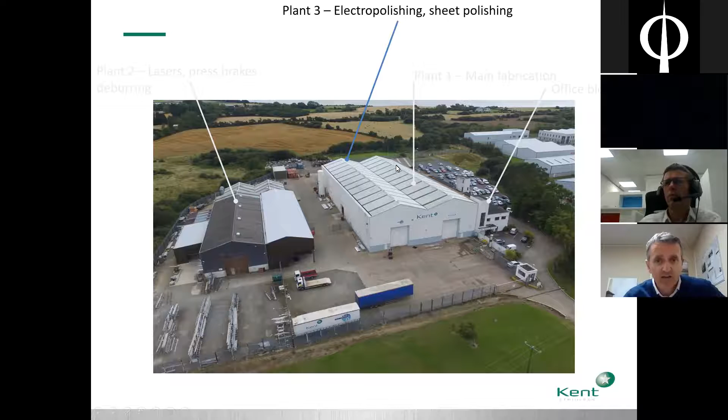A thing we really pride ourselves on is the finish of our product - we're not happy unless it's finished to the highest possible degree. In-house we've got electropolishing facilities, manual sheet polishing, and automated sheet polishing. A secondary fabrication area was just finished towards the end of 2020, and surrounding that we've done a huge amount of civils works to allow free movement of trucks and forklifts around the building.

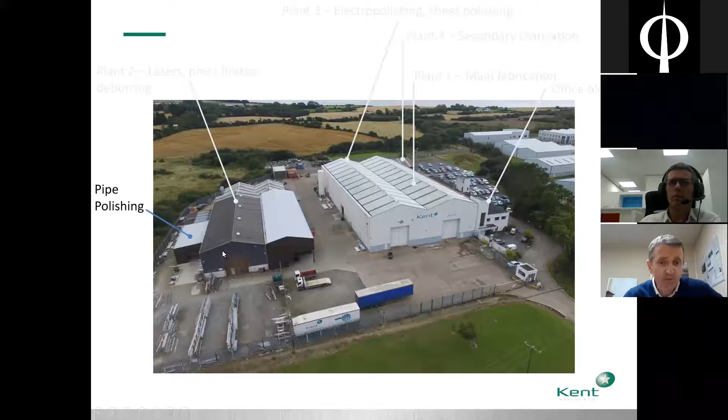You can just make out the roof of that building - another area for pipe polishing, which itself is a specialized skill, and then bead blasting, another type of finish which is also a specialized skill. We're unique in having all these different processes under one roof, under one company.

Some of these processes you might be familiar with. The big thing our owner Pat Kent has always done over the years is invest in equipment - in the last couple of years we've invested in new sheet laser cutting. This pretty new machine allows us to cut things like sheet, box section, round shapes, pipes and tubes, all part of the design and fabrication process. As we take an idea from an architect, engineer, or landscape architect and turn it into reality, we're using all this equipment constantly.

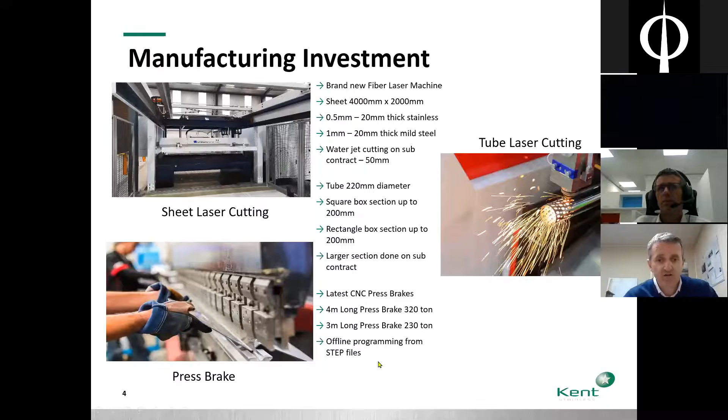The brake press was another investment in the last couple of years.

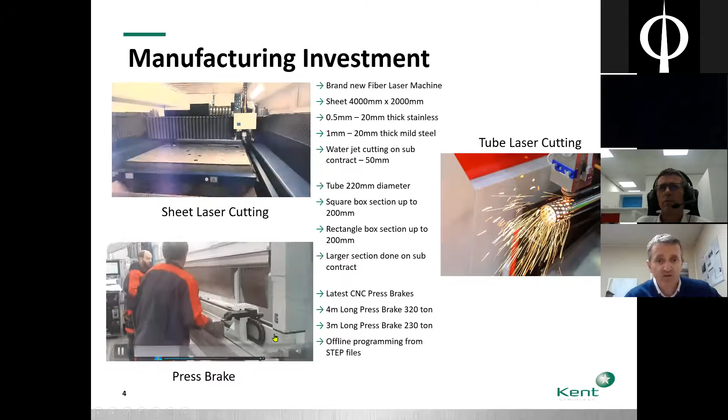Again, it's just allowing you more flexibility on what you can actually produce, fabricate, and put out the door. So it's always allowing us better tolerances on our products, better finish on our products, and that's the whole idea of investing in this equipment. So constantly looking to improve what we actually put out the door.

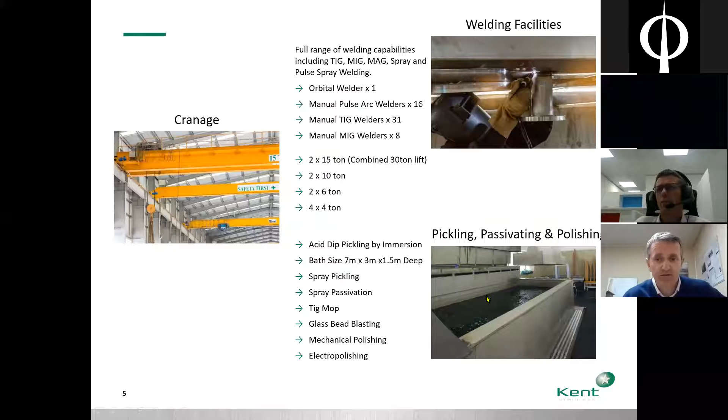Just some of the other equipment that is relatively unique. This pickling and passivating plant is the only one in Ireland for stainless steel. So when we have finished all the welding, welding obviously generates heat, and you have things like scorch marks and manufacturing marks on the product. We then dip it in this plant, which takes away all those marks for final finish.

So the areas we work in, the one area I'm really going to speak about today is civils landscapes. But just to be aware, we do work in a range of areas. Civils landscapes has really, for the last 10-15 years, been the growth driver of the business. When I started, we had a turnover of about 300,000 euros in this division. In 2019, it was about 3.5 million euros. So it's been a huge growth in the past 10 years.

That's driven by public realm improvements, mainly in London, but also in Ireland, especially in the last 5 years. We've seen a lot of projects in Ireland, and really what councils and developers are trying to do is open up public realm areas, make them more accessible, have shared surfaces so they're usable for everybody. The big thing we've seen, which can be quite simple, is trying to hide services within the public realm, either underground or within the finished surface level.

And really that's what's driven our business, down to about 5 or 6 products - things like access covers, ventilation grills, in-ground power units, planters for planting areas, and signage is another big thing. When you look at them from the outside it can seem quite simple, but when you see how not to do it and how to do it properly, there is such a massive difference. It makes such a massive difference to the final project.

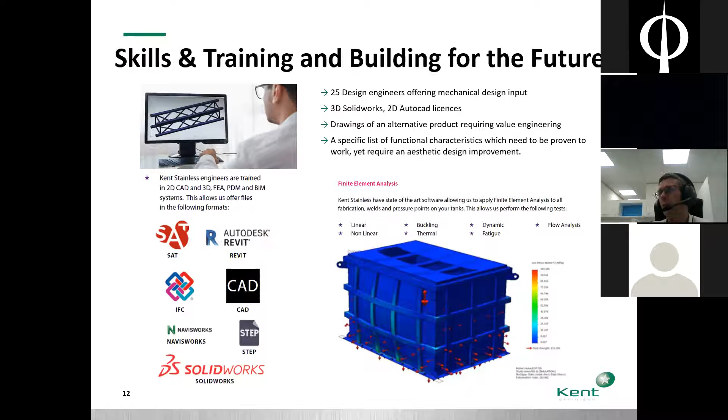One of the difficulties we see there is the IoTs, FÁS and the ETBs - they're not able to keep pace with the leading manufacturers and that kind of new technology. So there is a little bit of a struggle there. We get a lot of our training from the OEMs on that, and I would feel personally myself that the OEMs maybe don't put out enough training material because it's a revenue source for them as well. So they're probably a little bit reluctant to share that training material with the Institutes of Technology and the ETBs, and that's a challenge that I think we have to overcome at some point.

When I talk about how we structure training and make sure we have all the skills we need, we've broken down the whole process into 4 or 5 key areas. One is supply chain, which is really material procurement, purchasing, logistics, dispatch and shipping. The key elements there are planning, negotiating, stocks, logistics, deliveries, and scheduling, which is now becoming a very key part to a manufacturing process. Lead times are getting shorter and demands are staying quite high, so scheduling is very important, and it's a supply chain issue.

What we do then is material preparation and kitting. Once you have material in, we have one team of people segregated off to do all of the pre-manufacturing operations. This is where your machine operation would come in, like milling machines, lasers, sawing, drilling, and then we get kits ready so that once we send material across to the fabrication area, the guys are ready to go and not waiting on anything, and that can have a big impact on efficiencies, or not, as the case may be.

Then our main area would be forming and fabrication, and this is pretty much craft driven, especially fabrication, because we're predominantly fabricate and welding is our core skill, and then assembly and testing after that. What we've done this year, as a change, is we appointed a full-time trainer who stays with all the young apprentices and makes sure they're getting state-of-the-art training and a lot of personal attention over the first year or so that they're in the business.

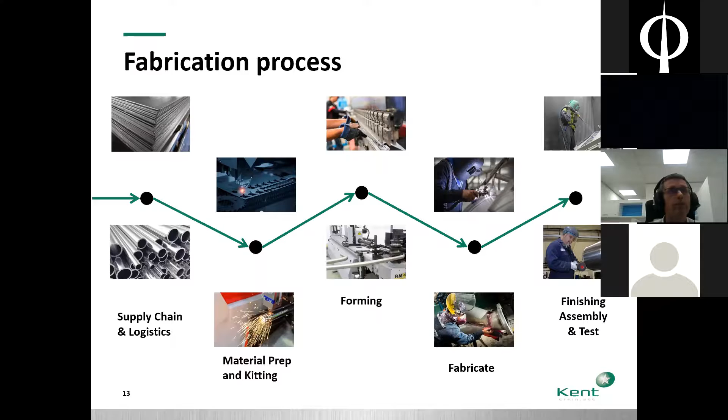Training then across all the departments—within Kent we would have 12 apprentices across the trades, mainly in fabrication, fitting and welding. As I said, we've appointed a full-time trainer who supports all those guys and works with them through FÁS. We also bring in journeyman welders and train them up as well. They wouldn't necessarily go through the apprenticeship program; they'd go through our own in-house program, which is about a 22-week program to get them up to speed, and then they'd be welders basically.

Machine operating is where the big difficulty is—we have difficulty attracting people in that area, and the reason is there's very little opportunity out there for people to get certified. So we're working with Carlow IT, with a broader industrial base in the southeast, to get some programs up for milling, drilling, laser cutting, folding and forming. One thing we're seeing is that this task or job area is falling between the cracks—people either want to go the apprentice route or the engineering route, and when engineers come back they don't want to be machine operating. There's a gap there in the market that we really have to address over the next couple of years.

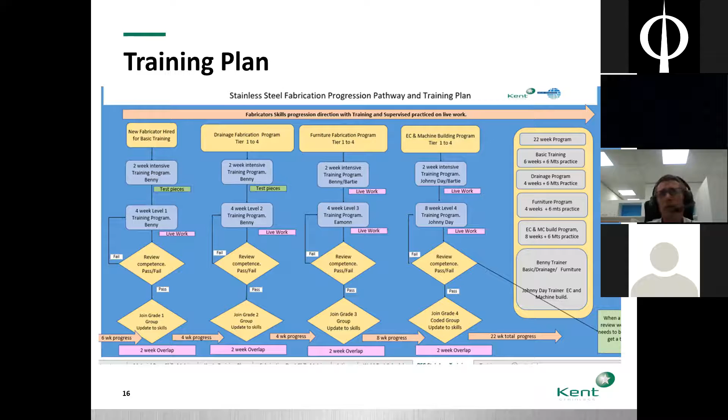We have this supported with up to 8 weeks formal training, and then 6 months of practice, all supervised by the trainer. So it's quite a good framework. We put a lot of work into it, and it does pay dividends - we're seeing that already. We introduced this about last February, March, and it is quite good.

So look, other initiatives - again, I suppose a big culture change was a dedicated one-man trainer in place since 2020.

I suppose the development of new technologies and new processes around folding. We brought in a software package called Boost about 2 years ago, and that has really changed the way that we manufacture products. Basically, what Boost will do is test every piece of every design before it goes to cutting and forming. So it has reduced the amount of waste and wrong parts by a considerable amount, and that increases efficiency. We brought in precision machining, and more polishing equipment and capability over the last 2 years or so.

Most of this is customer driven. What we do is, especially in the public realm area, we see increasing demands, and people need things to look nice. And that's really what's driving it, and it's keeping us at the forefront of the competition as well.

Recruitment challenges - apprentices are hard to find, especially good apprentices, but once we show them a pathway and a structure, I think we can attract and keep them. They need to be flexible, multi-skilled, and confident working with automation. I think that's the next step change for Kent - cooperating with robots, maybe not full robotics, but that's coming, and we have to build that into our selection process over the next 5 to 10 years.

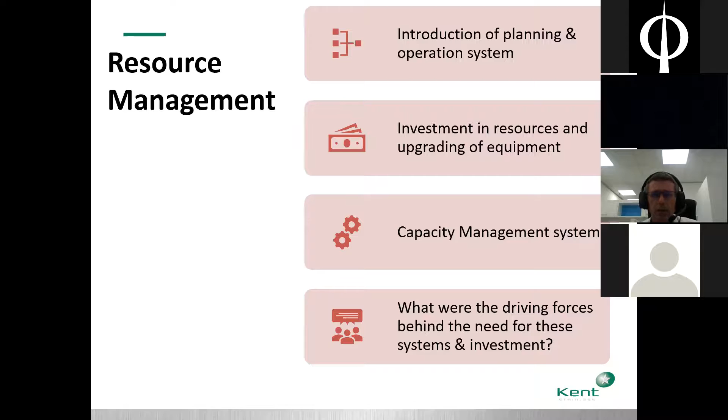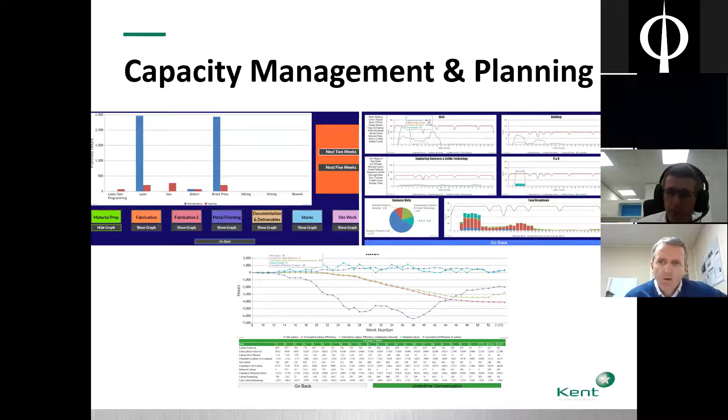I think that's about it for me now. There's just one slide showing a little bit about where we're going with visual management - it's important we keep all our employees informed of how we're doing on a daily, weekly, monthly, and quarterly basis. That's a snapshot of some of the graphs and visual aids we're rolling out. So I hope you got something from that in terms of skills and how we're managing them, and it gives you confidence that we can meet your needs going forward.

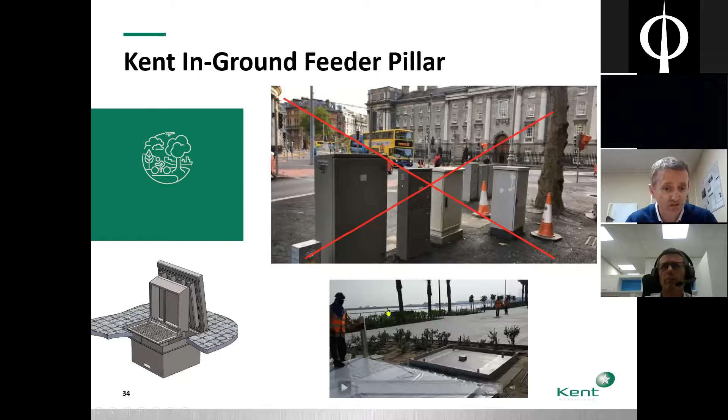And I suppose the issues that we've seen over the years, we've all seen areas like this where you have mini pillars, feeder pillars, necessary service equipment that is on the street, powering street lights, used for tram systems, or traffic lights and other necessary services that have to be in the public realm. So our challenge is always to reduce this visual impact and remove as much of this as we can and place it underground. That's where the in-ground power unit came from.

So what is it? First of all, it's that environmental and comfort factor. You're taking generators and noise pollution out of the equation and making an area as comfortable and environmentally friendly as possible. The health and safety factor - you don't need any special training to use our product. It's a very simple product to use. You don't need operation and maintenance training, it's a very simple hinge cover to use.

Why it's come about, and where the drive for this product has come from, is these shared surfaces - you're implementing public realm strategies, and you need accessible power in these locations most of the time. We've just seen a demand, especially in London, especially in the Middle East, for this type of product.

What we've come up with in the last couple of years is that we've included within the unit a system where you can actually generate revenue from the in-ground power unit. By installing the cover, there's obviously a cost - you have to buy the unit, you have to install it - but we build in a meter now, so you can charge the end user who's using the power. We've seen typically after about 6 months you've recouped the installation cost, you've recouped the purchase cost, and then you actually start to generate revenue. So that's been a big addition to the unit.

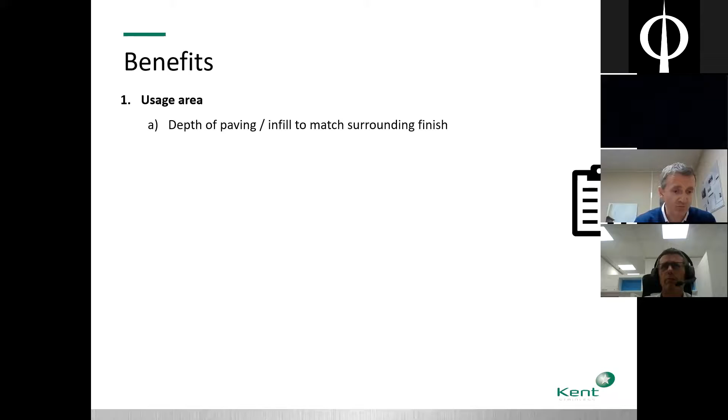Benefits of it: the usage area - you're always trying to hide that as much as possible in the shared surface. You've spent probably hundreds of thousands of euros on paving and installing and designing it, making sure that surface is consistent and a nice flat surface. So removing upstands from the surface is always a big key of what we're doing. Load bearing, obviously, in these areas - it is a shared surface, so typically you will have fire trucks or emergency vehicles that will drive over this. So we test and manufacture that to EN 124.

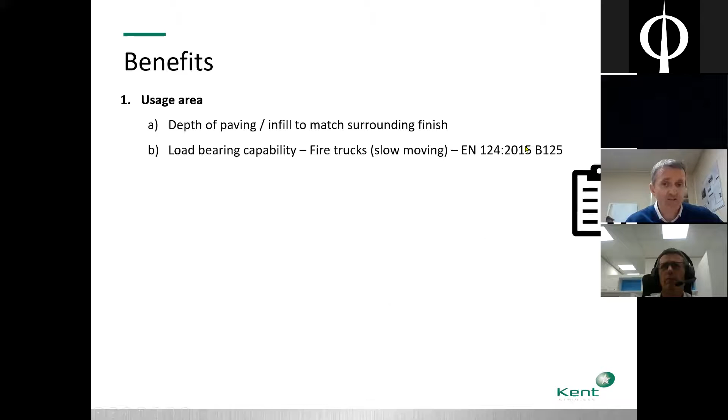Power requirements - typically we will see single phase and 3-phase within the boxes. What we've seen in the last probably 5 years is an emergence of including data points and fiber and audio socket outlets in the box as well. So what the data point allows you to do is create Wi-Fi hotspots in that particular area, again making the whole area very user friendly. But it also allows vendors to do card payment and contactless payments as well. So it's a big benefit to have that in such an easy location.

A single in-ground unit can be used to power many different applications. So it can be used for maintenance - that socket can be 3-phase or single phase, but it could be used for things like power washers for maintenance, and then obviously for vendors or street traders as well. So multiple uses from an individual product.

Putting electrics underground is difficult, but we make sure everything is IP67 rated and tested, and we use electrics only from reputable sources. So we use companies like MK and Schneider for RCBOs and things like that.

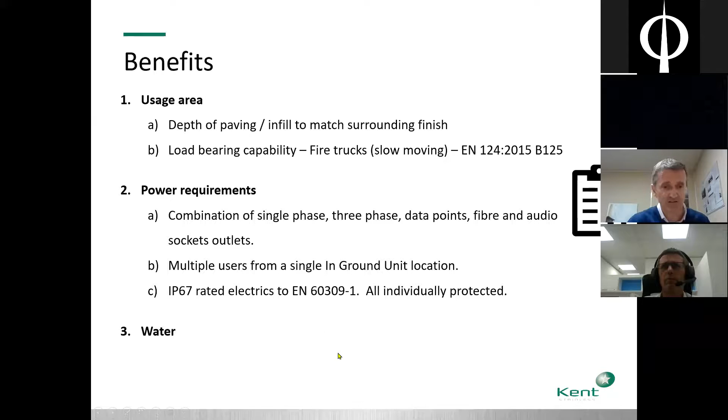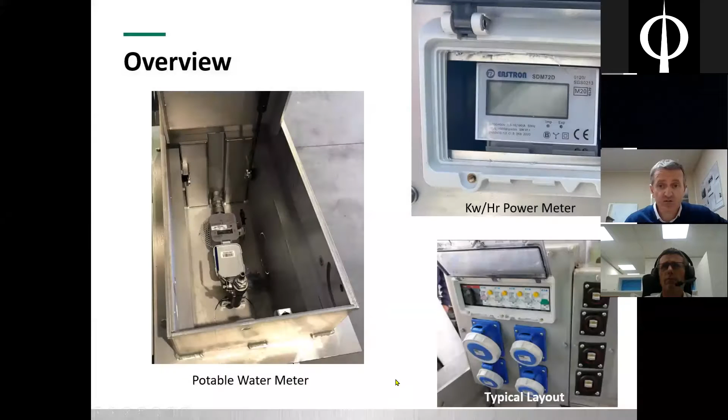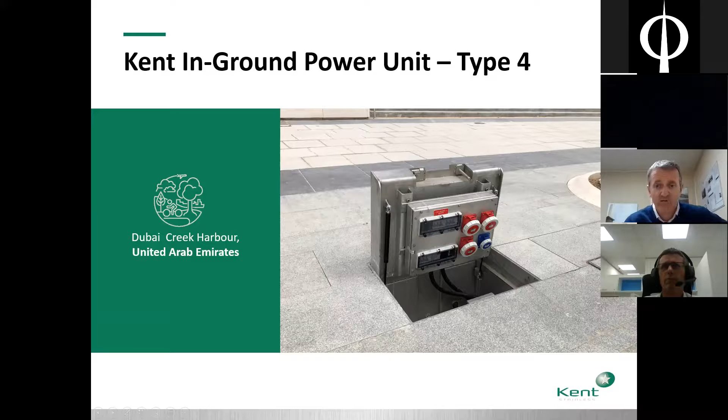What happens is the user will come along and plug into the plug here, but then they actually close the tray down during operation as well. You can see here there's a cable exit point. When that's not in use, you've got this little cover here which blocks off that hole, so it's not a trip hazard, or a trip for high heels or anything like that. But during use, this area allows the cables to come out. So it's literally in this position for whatever it takes—30 seconds to a minute—to plug in the plugs, and then you close it back down again, reducing that trip hazard.

Again, just showing the data points here—single phase power with data points. But again, you can see the recessed access covers in the background and the lines of paving. You can see the cover matching the lines of paving here. So again, getting in very early with the landscape architect and with the contractors to match this frame size to exactly the cut lines on the paving.

That's quite a simple thing to do for us as a company. It's not for every single company, but that's just the way our company is set up. As Michael said, with the amount of designers and engineers we've got, and the fabrication skills we have, that's just the way our company is set and where we've been going for the last 10 years.

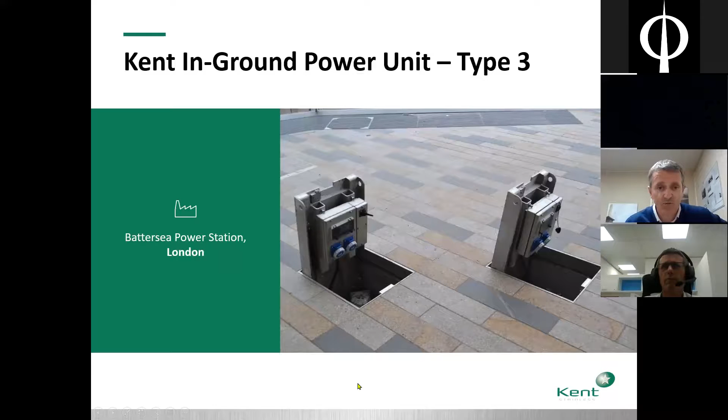Having BIM software and 3D SolidWorks software allows us to do structural testing on a product like this, and this applies across the board. By being able to do that testing, we can reduce the thickness of the steel or increase it as the case may be, but we're always trying to decrease it.

If you didn't have that test, you might increase this by 25%, and then you're increasing the visual impact. So everything has a knock-on effect. Our ability to accurately test this to a B125 or D400 loading impacts the thickness of the steel we use, which then impacts the visual impact. A simple thing, but it has a knock-on effect on the final project, and that's why we always like to get in early at design stages.

Here we have a shallow unit. This was a particular project where they had a high slab, so there was an underground car park here, and the build-up was quite shallow. The first unit I showed you was about 500 millimeters deep; this was less than 200 millimeters. So again, designing for a specific issue on that site, keeping all the other parts of the product the same, so it's still recessed, still locked down, still has the hinged cover, but just reducing that depth so they were able to install them on this specific site.

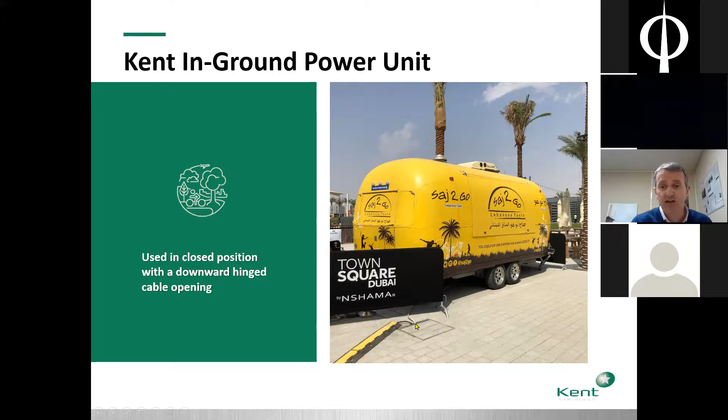How it looks in actual use, then in operation. Here's a very typical food truck plugged into the unit. This shows that the unit is closed during operation. What happens is the operator comes, opens the cover, plugs in, and then closes it back down. Just showing a close-up of how that works in real life. The idea, as I said, is we're always trying to reduce our impact on this shared surface.

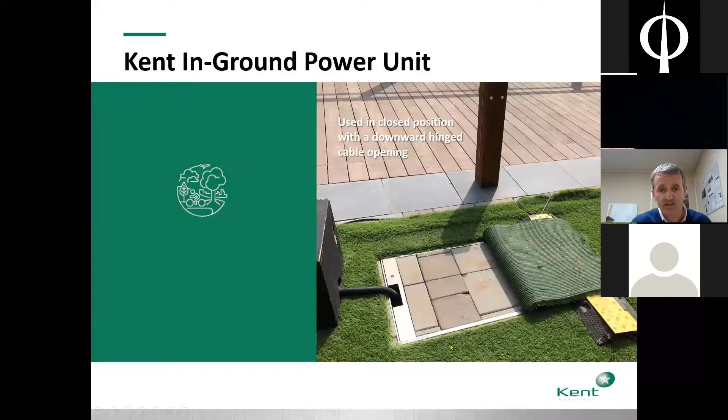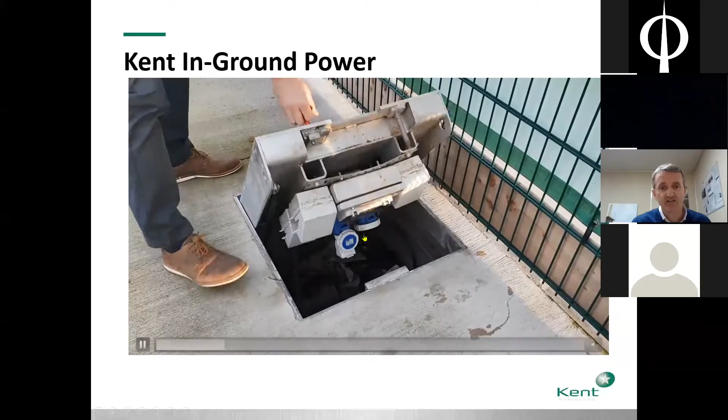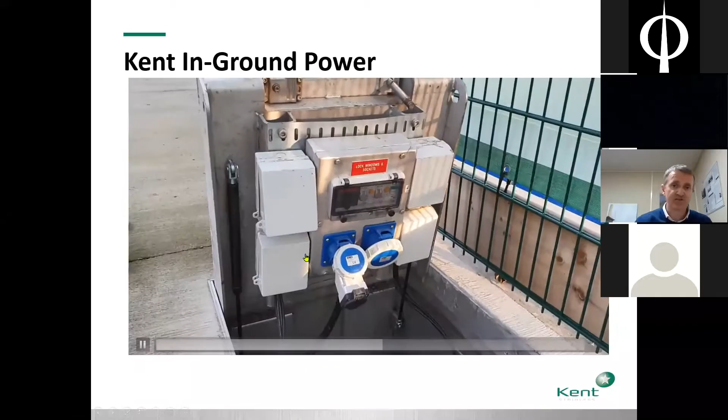Just to show you how it actually opens - you've got a slam lock and a secondary lock here, which is just for holding it down. This particular cover probably weighs, this is a little smaller, so it's about 100 kilos including the infill. You can see it's quite easy to open with the lifting points. We didn't actually put these data points on it - the customer put them on himself afterwards. So not the prettiest thing, but it's functional and does what it's supposed to do.

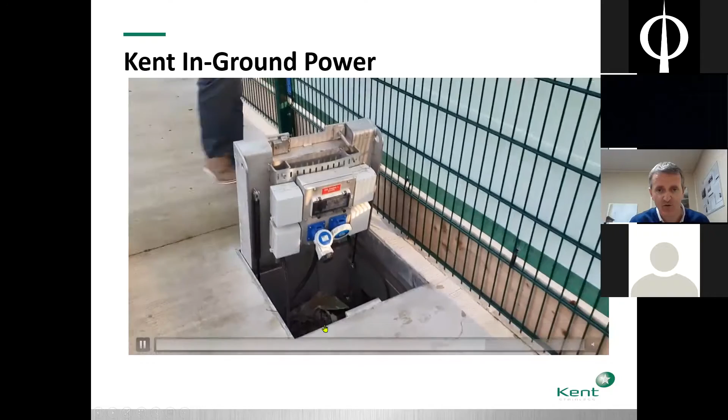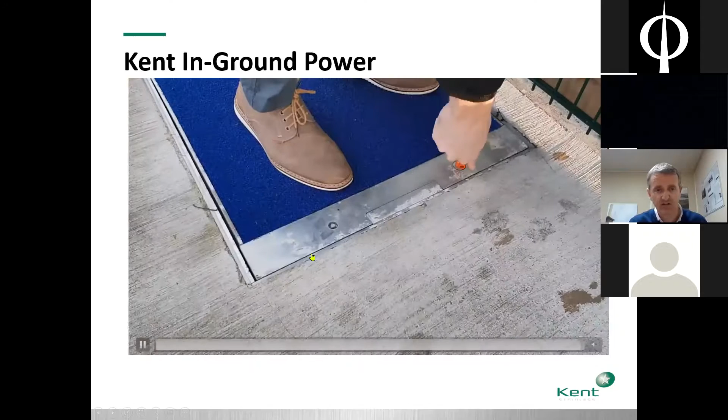You see the single phase power here and the RCBOs and isolators that go with the sockets. The close is just simple - you're using your body weight to close it. The infill here is obviously pretty poor and doesn't match the surrounding floor level, but we would always supply the covers empty and they're infilled by the contractors. But this just gives you an idea of the operation.

So there are hinged access covers on some of the benches, or hinged parts of the benches, which we designed as well. We have a huge range of products, and it's impossible to show you them all in a short time frame. So we do a CPD on all these products, going through 4 or 5 different areas, showing the process from design all the way through to final installation. I hope you can see the innovation in what we're doing here.

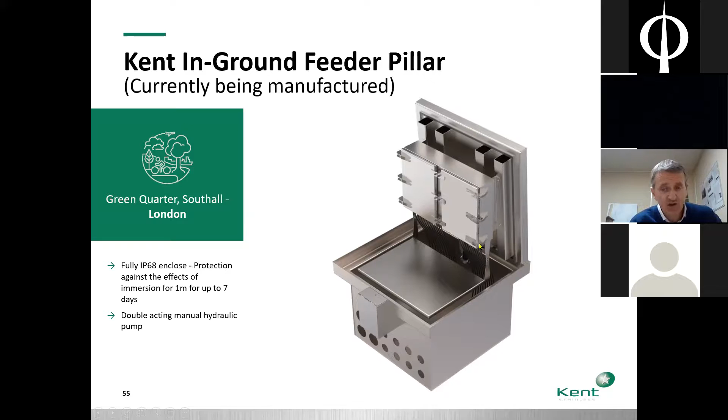The idea is very similar to the in-ground unit, just a much larger version of it. This obviously hinges closed, and you have the same idea that you're paving through it. This gives you some idea of the scale of what's been manufactured here, but the big difference is this is IP68 rated.

So this is flood rated for up to a week, meaning it can be submerged for a week without any water ingress into it. You can see a huge amount of interface for cables here, so incoming cables, various different types of cables coming to this feeder pillar.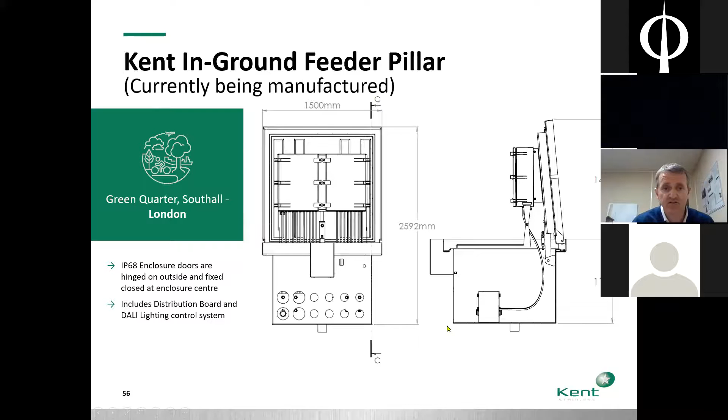Like I said, this is the first time we're actually making these. We're making 2 at the moment. Without the processes and capabilities that Michael spoke about, and the history that we have, we just would not be able to develop products like this. This is a real good example of how that turns into practice.

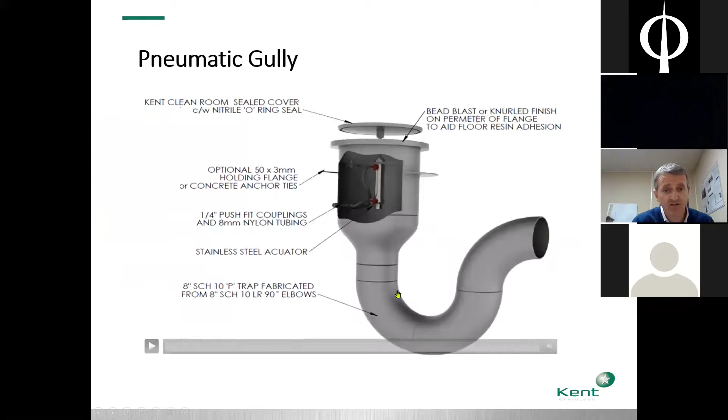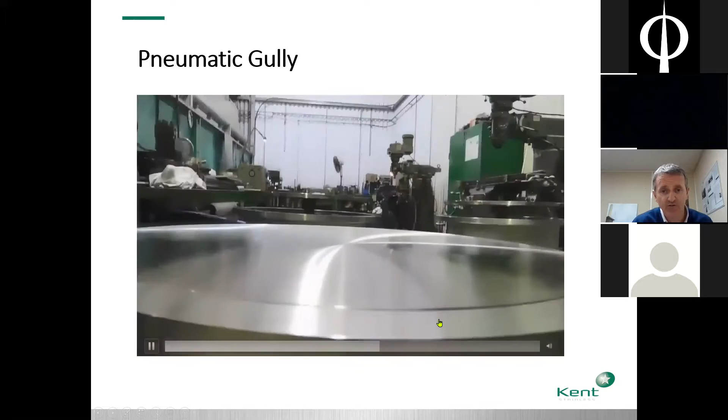Another area here, I'll show you quickly some from other areas. This is a pneumatic drain that we developed for pharmaceutical products, just to give you an idea of the scale of what we're doing. This is a drain that would typically be removed by hand, but we've developed a pneumatic version of that for the pharma industry.

That was developed about 20 years ago for Pfizer, and has now been shipped to Singapore. We've shipped to North America, Canada. A very specific product, but mainly used for pharmaceutical bio-waste products.

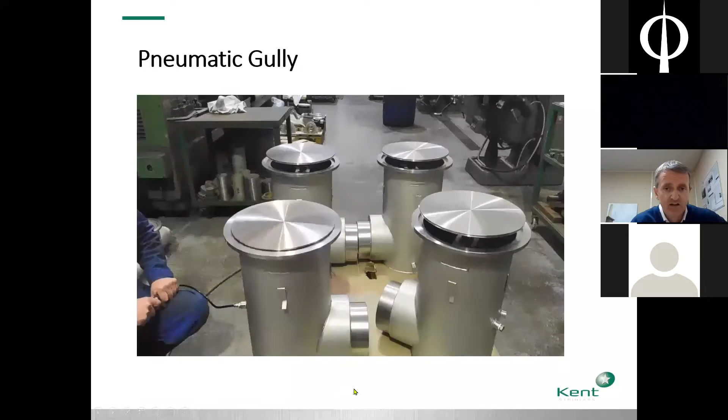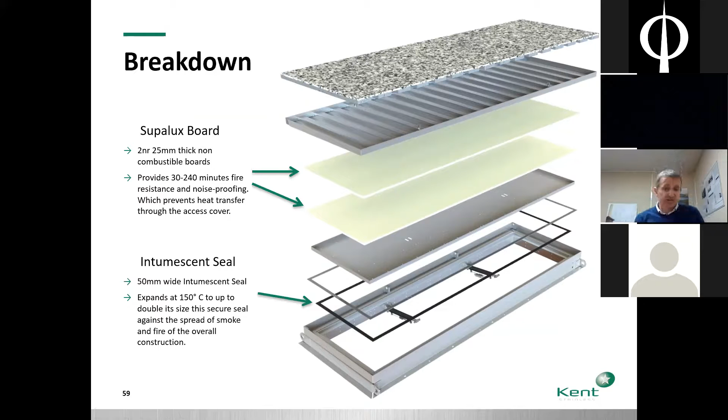So not something you're going to see on every single building site in the country, but it's a very unique product, designed from scratch with the architect, the landscape architect, the consultant engineer, and the end client. This was a major project out in the Middle East that we did a couple of years ago.

Again, a relatively simple product, but what's slightly different to us from our competitors is that some can do heel-proof grills and some can do 44-ton trucks that will take loading, but I think we're the only people in the UK and Ireland who can do both—heel-proof and full loading of a 44-ton fire truck or garbage truck, as shown here. Again, always trying to reduce that visual impact.

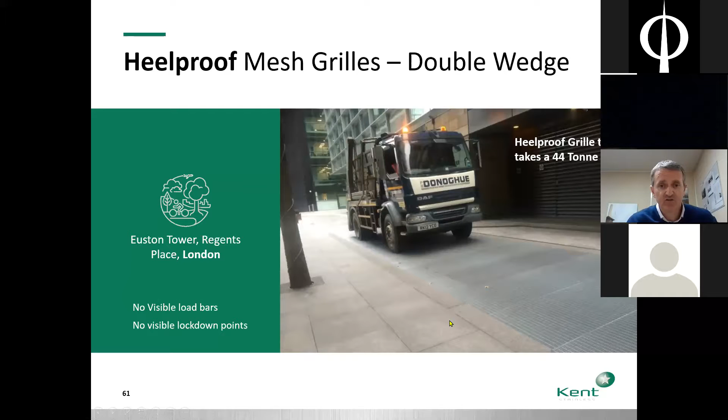Maybe 15 years ago, they would have built an upstand here, maybe put bollards around the grill to prevent people walking on them. We're trying to get away from designs like that so you're keeping that shared surface. Hidden slot drain is something, again, quite simple compared to the hydraulic or fire-rated covers, but just a simple thing we were asked to do one time—they didn't want to see any steel at the finished floor level.

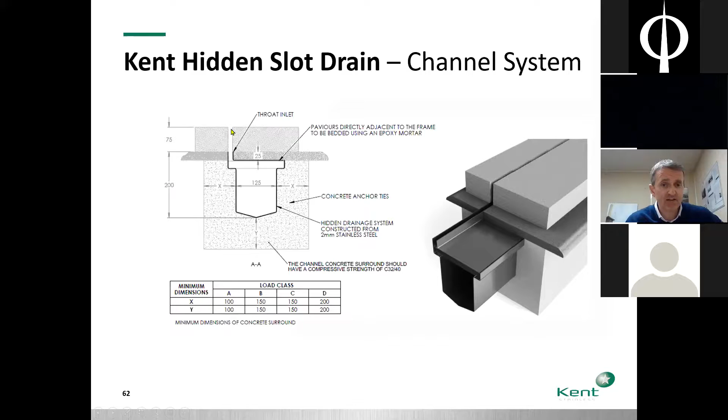So just literally using the paving as the actual throat for the slot drain, keeping the steel down below the paving slab. Okay, so that's pretty much it.

I think we're bang on time, just about 50 minutes. So I hope that's given you a bit of a flavour and a taste for what we're doing here, and the innovation we bring to fabricated products, designing these specifically for public realm. We do have a full CPD presentation that we do ourselves, and we're doing these all the time, so if anyone's interested just let me know and we can arrange that.

Again, thanks, Clara. Yeah, just again lads, to thank you for today's presentation. Great that you could get involved and share what you're doing. It's fascinating work, and even some of the points I took off, especially Michael, in relation to training, and as graduates come in, just having a pathway and a training plan in place for them is so attractive. And as you say, developing the relationship with colleges, lean management, the focus on professional development, which in the Southeast region as engineers we're really focused on.

And I picked it up as well, William, that I think you made a veiled invite for a factory tour. Yeah, absolutely, our doors are always open. We love having people here because you wouldn't believe the amount of times it's led to something happening - people walking in, seeing something being made, and saying 'geez, I could have done with that two years ago' or 'I need that but slightly tweaked.' We do it all the time. Enterprise Ireland are very good, they have a scheme where we can bring buyers to the factory. So our door is absolutely always open for anybody, once we get over this current issue, of course.